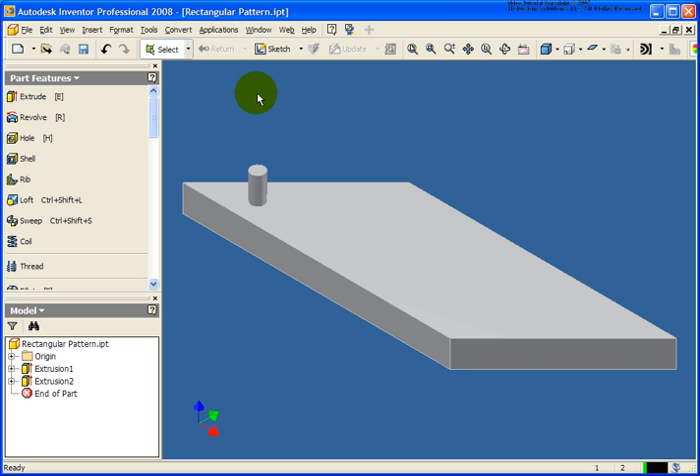In this lesson, we will be covering how to create a rectangular pattern of a feature and also of the entire part. The file I have open is Rectangular Pattern.ipt, located in your Chapter 4 exercise folder.

Before I start, let's take a look at the front view so you understand the geometry drawn here. Notice we have a horizontal line and two angle lines. From an isometric view it kind of looks like they're horizontal and vertical, but they're not.

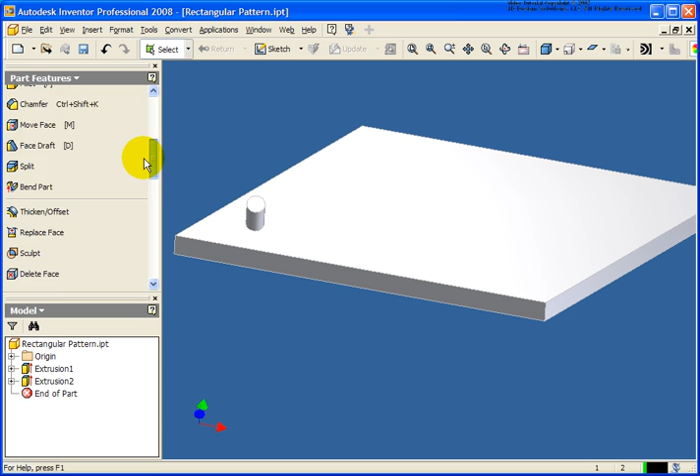What I want to do is take that cylinder and create a pattern of it. From the Part Features panel, I'll click on Rectangular Pattern. For the feature, you'll see the arrow is red, so I'll select that cylinder. Now for direction 1, I'll click on that.

I'm going to select an edge on the part. These edges do not have to be horizontal and vertical. In this case, it's going in the wrong direction, so I'll flip that direction.

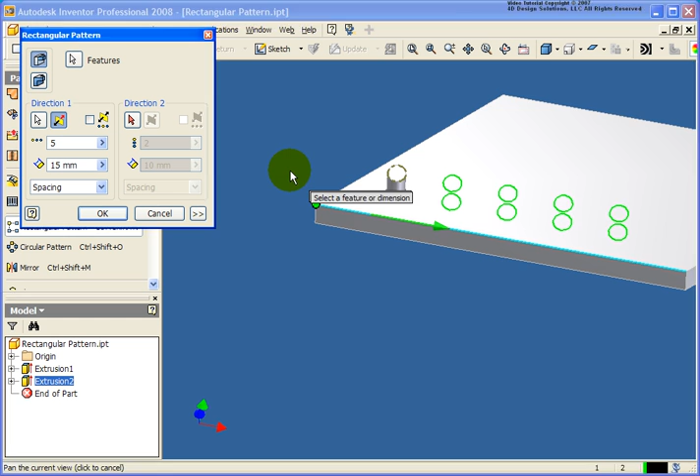I'll say I want to have 5 of them with a spacing of 15 millimeters. There's also an option up here to do a midplane, where they'll go in both directions evenly. In this case that's not what I want, so I'll uncheck that. If that's all you want, you'd click OK.

In this case, I also want some going in direction 2, so I'll click on the direction 2 arrow and select the other edge of the part. Again, notice that wasn't vertical - it's an angle line. It could be horizontal or vertical, it does not matter.

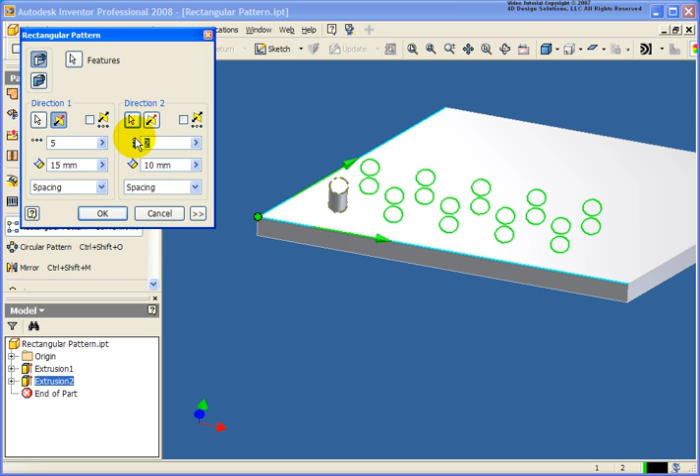I'm going to change the count to 3, and let's also change that spacing to 15 as well. For now, I'll go ahead and click OK, and bring the browser up so we can take a better look at what we have here.

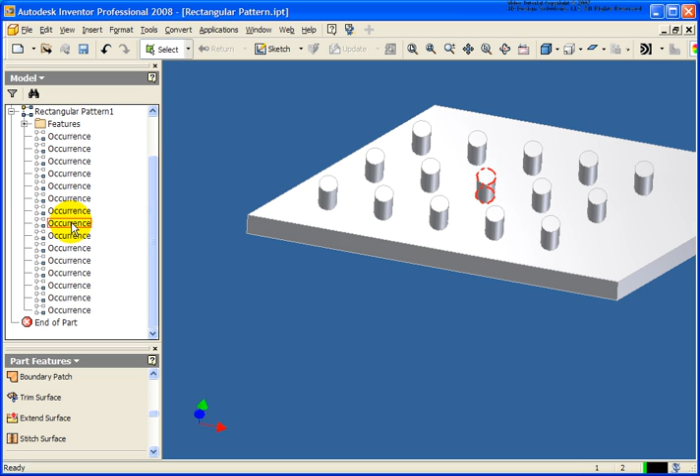In the browser now, you'll notice we have the rectangular pattern, and each of these is an occurrence. As I move my cursor over them in the browser, I can go back - let's say I wanted to put another feature right in the middle of that part.

I can right-click and click Suppress, and it'll turn the visibility of that part back off. Now you might be wondering, what happens if I go back and edit that pattern? Let's go ahead and do that.

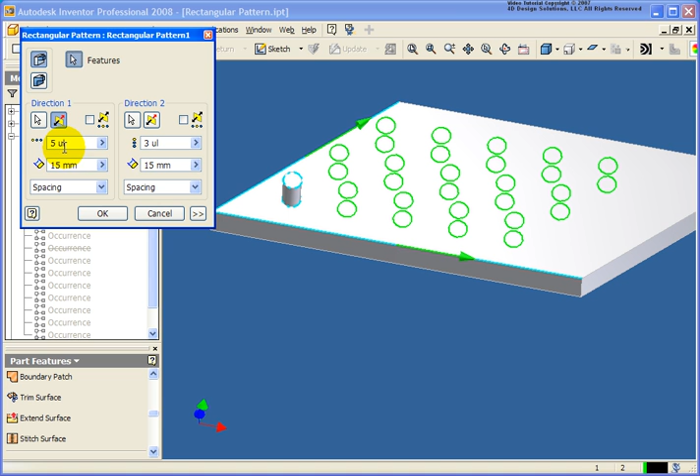I'm going to right-click, Edit Feature, or double-click on the pattern, and let's change the count from 5 to 6. You'll notice that same component is still suppressed, and I can always come back and right-click to unsuppress that.

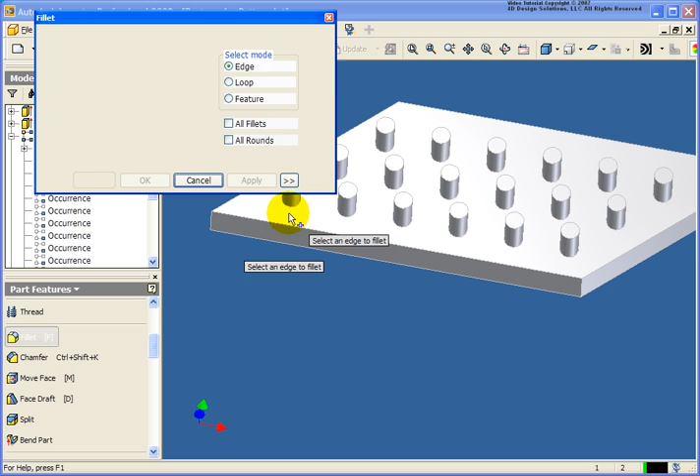Now I'd like to come back and add another feature. For example, let's say I want to place a fillet on this bottom edge. You'll notice at this point that the fillet did not occur on the patterned features.

Let's examine why that is. If I go back right now and minimize that for a second, then edit feature and go back to add the fillet, you'll notice it does not appear on the screen. The reason it doesn't appear is because it's occurring after the pattern.

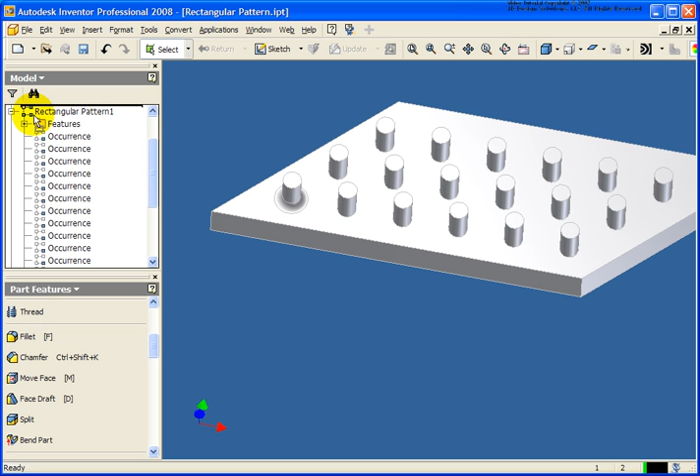So what I'm going to do is drag the fillet above the pattern. Let me minimize that so you can see it. Now I have my extrusion 1, 2, and the fillet. So now if I double-click on the pattern, let's edit that.

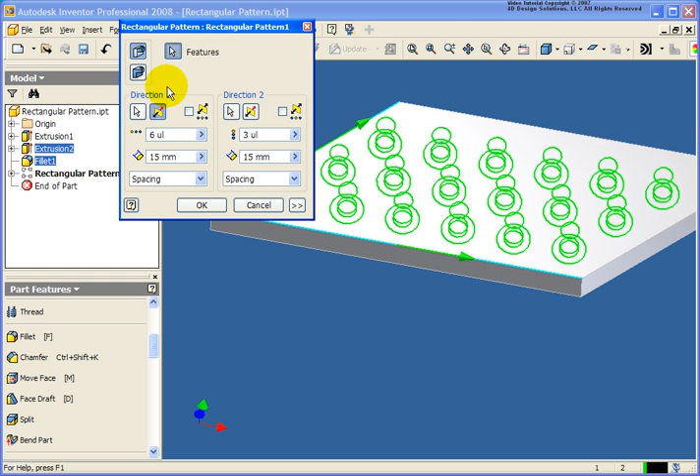Now click on the feature, I'm going to add the fillet. If by chance you have a hard time selecting it in the graphics window, you can always select it in the browser. I'll go ahead and click OK, and you'll see that the fillet was now added.

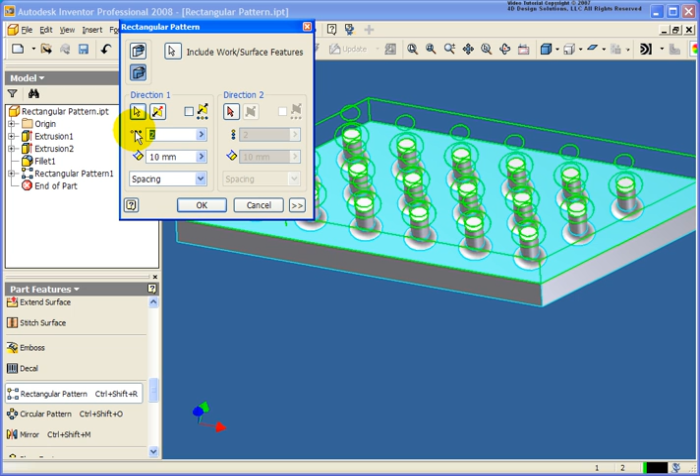I can also go back with the pattern tool, and you can do the entire part. In this case, we'll just select it, and let's do 3 of them at 100 millimeters.

In this case, let's go back and reselect direction 1 - I selected the wrong edge. Let's reverse that. You could also do the same for direction 2, to have it go back up a certain number of units. Let's try 50, see what that looks like.

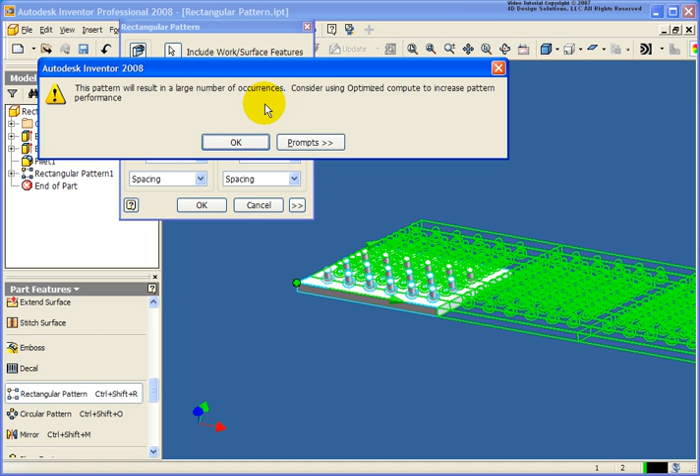As soon as I said 50, the dialog box popped up telling me what I should consider doing to increase performance. If I click OK on that and expand the dialog box, down here we have the compute options: optimized and identical.

The identical option means the features are going to be exactly the same as they are here. In an optimized pattern, the database will do a faster calculation. So if you go over 50 occurrences, that's what Inventor is going to suggest we do.

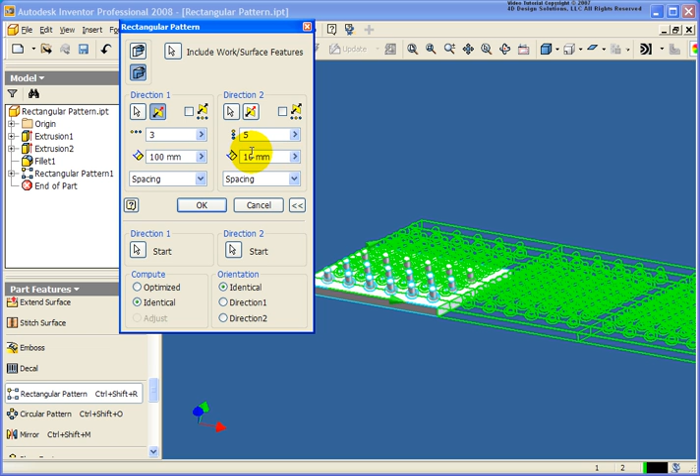In the circular pattern exercise, I will talk about what the adjust option does. But for now, I'm going to take that back to identical. I'll change that back to 5 and change the spacing to 50, to see what that looks like.

The nice part is you always get the preview image, so we can update that. Go ahead, click OK, and I now have my completed part.